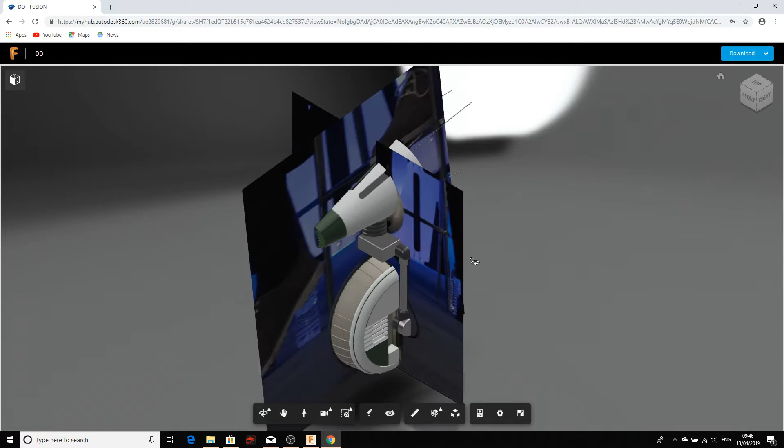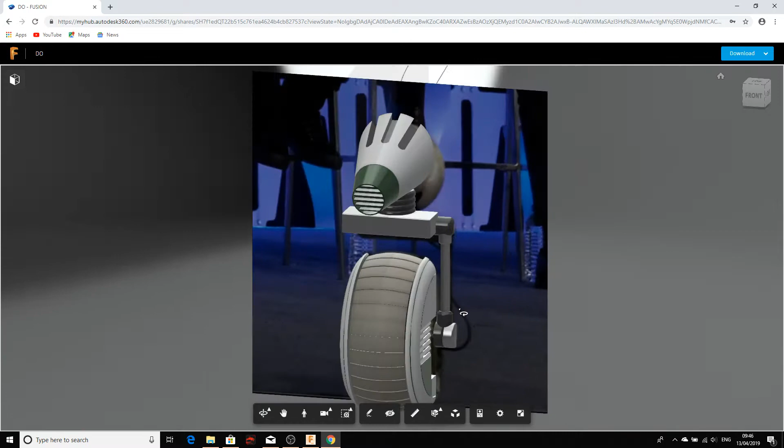So this is one that I've worked on recently from the new movie, and what's really handy I think with these, if you're building the models, and I'm just hiding these reference screens that we've got, but what you can start to do is you can start to look at how the model's built. You can see the individual components and parts that are in the model, which then lets you sort of get an idea of how it actually goes together.

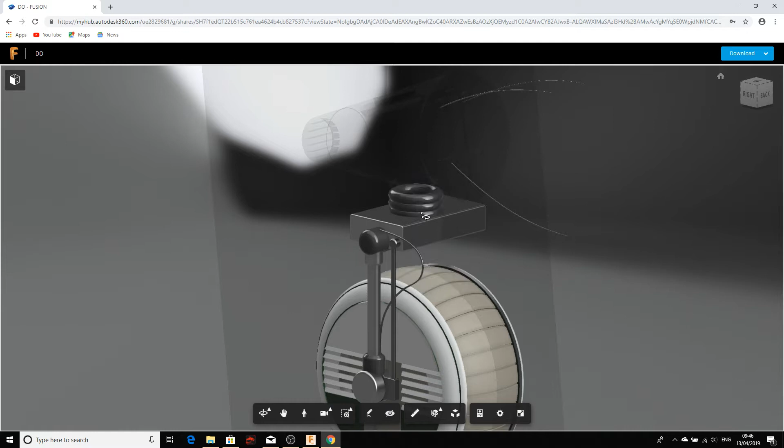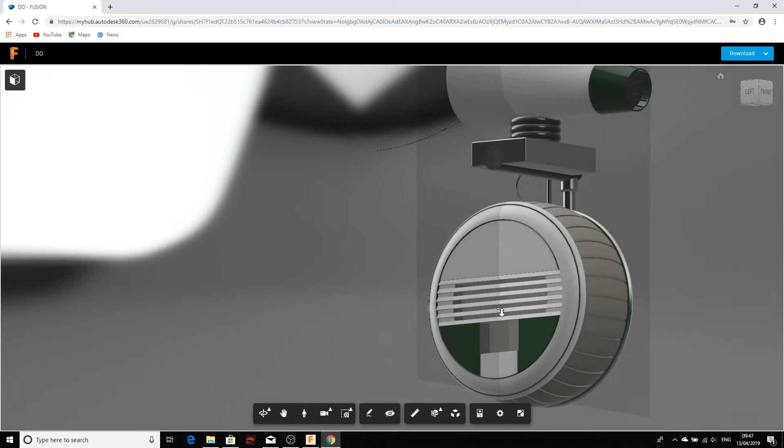So you can kind of really see the model and all of the assembly bits, and it's just really quite useful, I guess, rather than the PDF instructions that we put together, just being able to kind of dig in and to start to look around at how things are constructed, and to be able to take things apart and just have a look at what's going on.

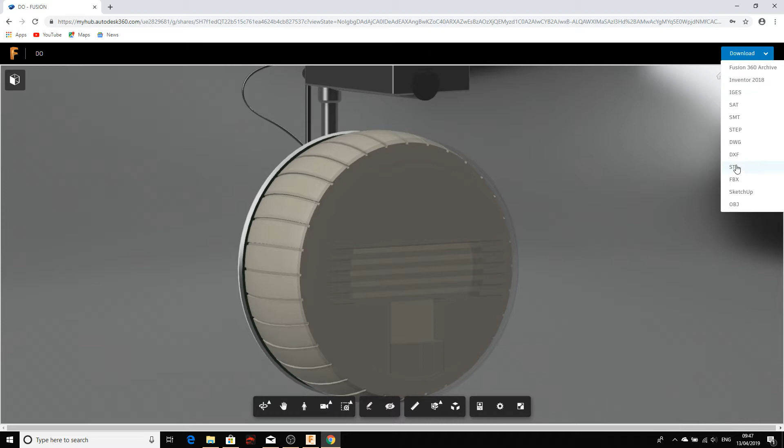So you've got in there a fairly basic set of tools through Fusion that lets you play around with this. What you can also do in here is you can download the file. So if we click on Fusion, you can send yourself an email link. You can download the step files. So it gives you access to all of the original files, which means that you can then install Fusion and start to work on them in your own kind of manner. So that's how you've got access to the designs.

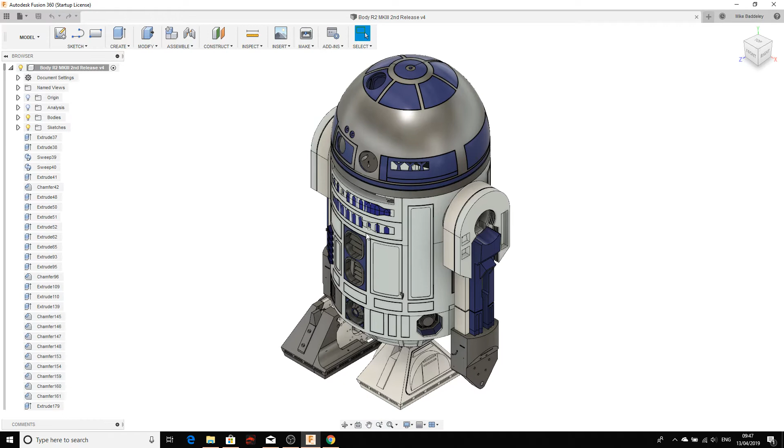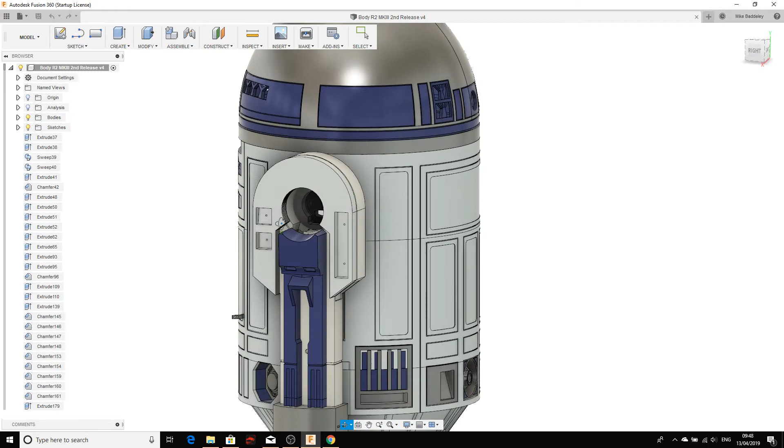What I was going to quickly do now is start to take you through the very basics of Fusion 360, but also more importantly, I guess, how you can start to cut your own pieces, just so that if you've got different size printers, you're not relying on me or the other guys to get them cut. You can cut them to whatever size you want, and cutting objects is fairly simple, really.

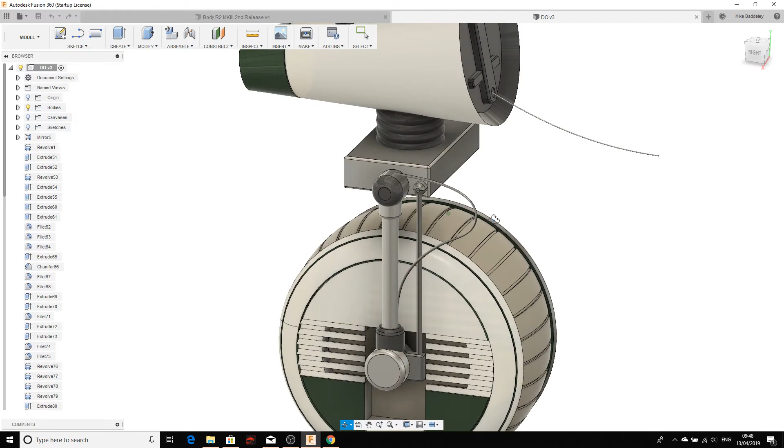So what I'll do is, just for the fun of it, actually, I might just pull up this little fella and just really start to demonstrate a couple of simple cuts. So there's still quite a bit of work to do on this. This was just the first sketch that I did.

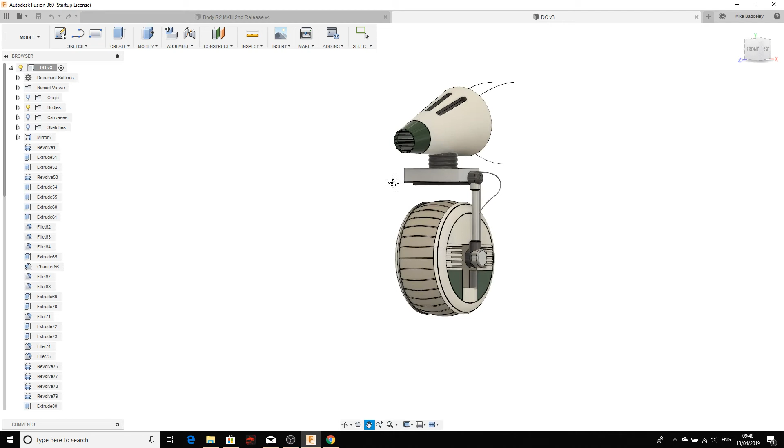Now, Fusion 360, if you've not used it before, basically the middle mouse button moves the object around. I tend to keep my finger on the shift key. If you press the shift key, you can spin it around like that, and that rotating and spinning gets you to most of where you need to, and then your mouse wheel will let you zoom in and out. If you get lost, the big cube at the top corner here, click on home and you're back in.

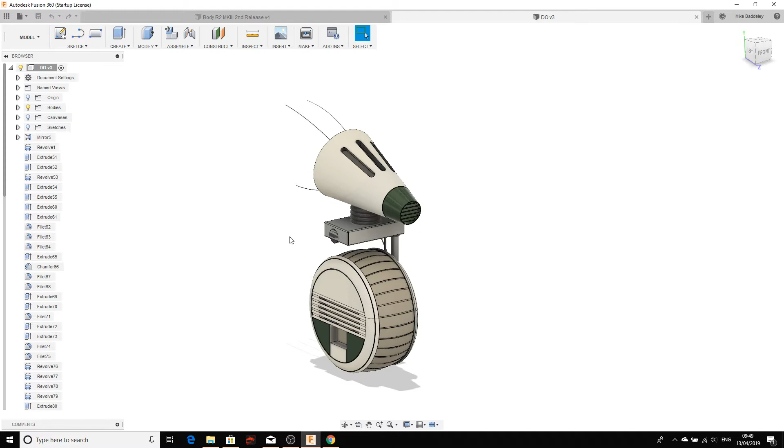So this isn't a Fusion 360 tutorial, but I'm just going to try and get you through the basics. So moving around, middle mouse key, press the shift key and you can spin it all around, and then you've got a cube which you can go to if you get lost, and the middle mouse wheel will let you zoom in and out. Okay, you got that?

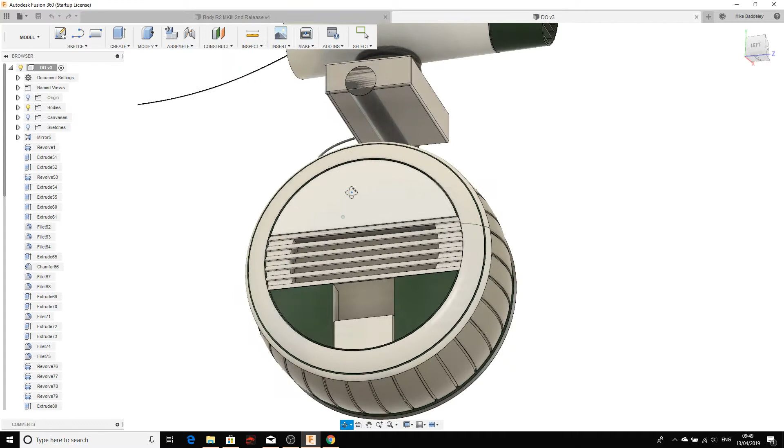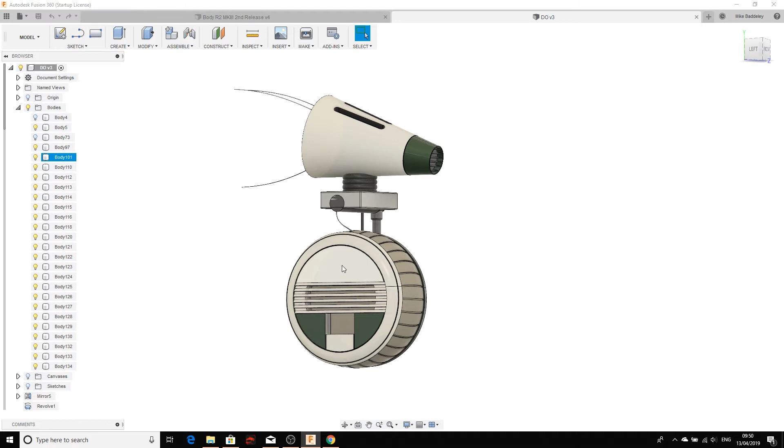Cool. Right, what we will do is, first of all I'm just going to do a simple cut on this side panel here. So, what you have on Fusion is you've got this browser window, and you can open this up and you can see all the individual parts that sit within here. And if you hover over them, it'll show you which parts they are. I'm going to make things simple, I'm just going to hide everything apart from this side panel that we're working on, which is that piece.

So the way you hide it is you just turn the little light bulbs off like this. I mean, there's probably quicker ways of turning them all off, but hey, I'll just click down here for the speed of it. And as you can see, each of the parts that make up that model are now disappearing.

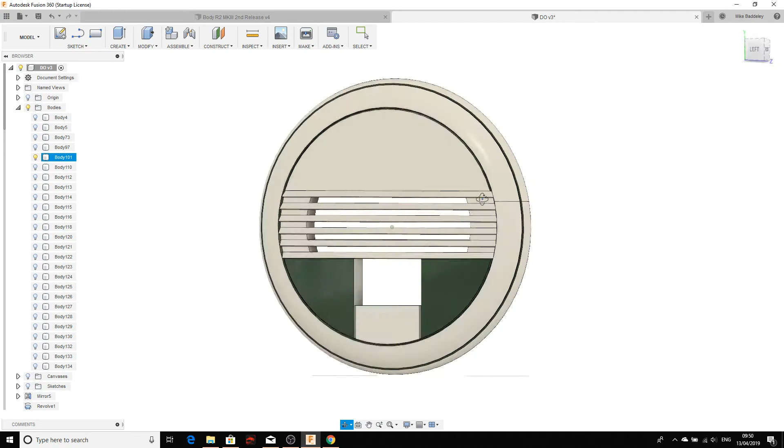So now that's the part that I want to cut. Okay, so I'll just click the house one to get it in there so we can see it. So what I'm going to do with this one, I think, is cut it in half, and I'll do a little bit of a dovetail there, so we've got a join. And I'll just take you through some of these really simple ways.

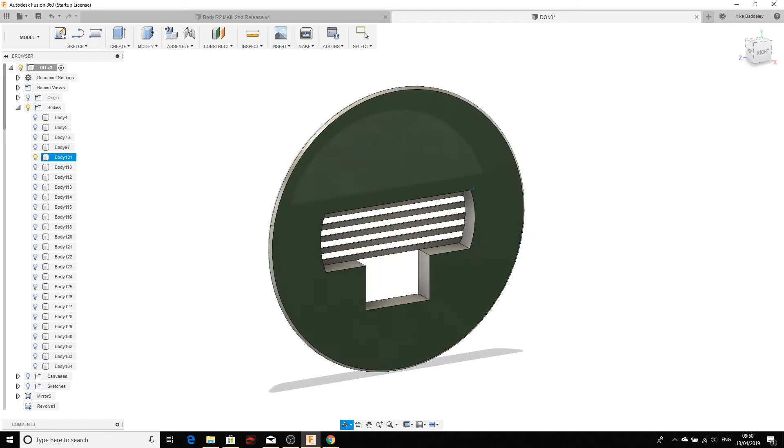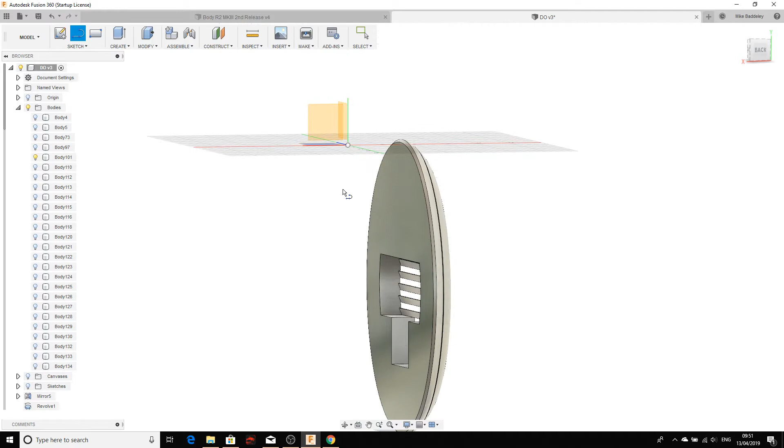So the way we cut something is we have to draw a sketch, and the sketch has to sit on a face. So in Fusion, if you click sketch and you click line, now what that's looking for is a face or a surface or a plane to be able to draw on. By default, you'll have these three little origins here, which are visible if you've got the origin buttons lit, or you can actually find a flat plane on the model.

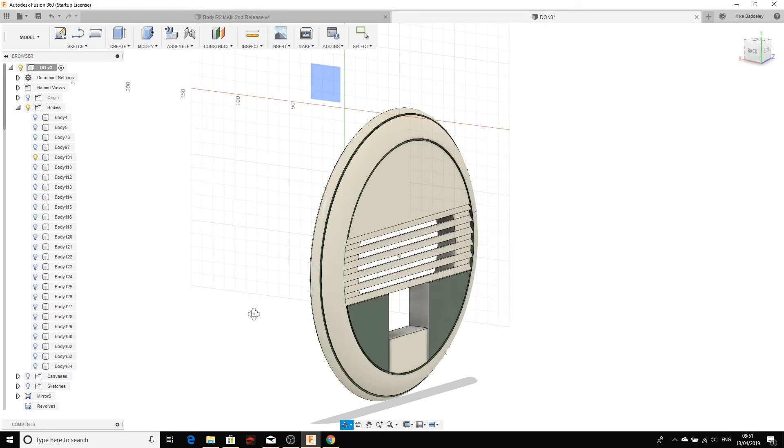The challenge we've got with Fusion is it doesn't allow you to select curved planes, only flat planes. So you have to find a flat plane. But for us, this is going to be quite simple. And to be honest, most of the models I do have got flat surfaces. So we're going to click on this one here. And now what we've created, as you can see, is almost like a piece of paper that's

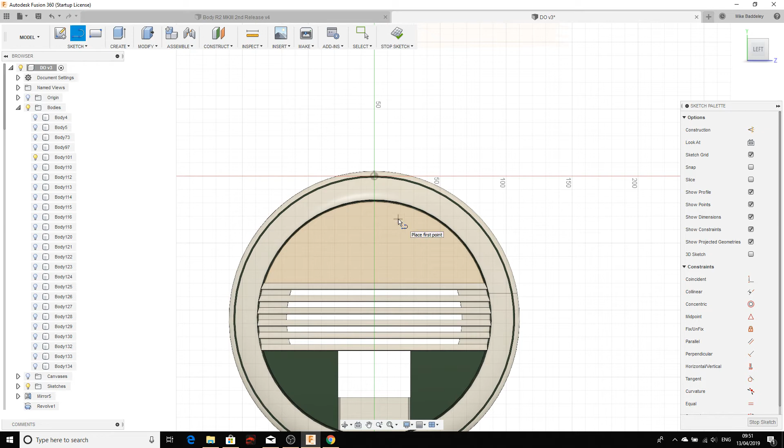linked to that piece. Now, if I want to do a simple cut, I can literally draw a line like this. There's your line. Any size, any angle. It doesn't even matter if it covers the object or not, but I'll just do it like that. Once you've completed that, you click tick, so the keys were just sketch and line, and we've created a line.

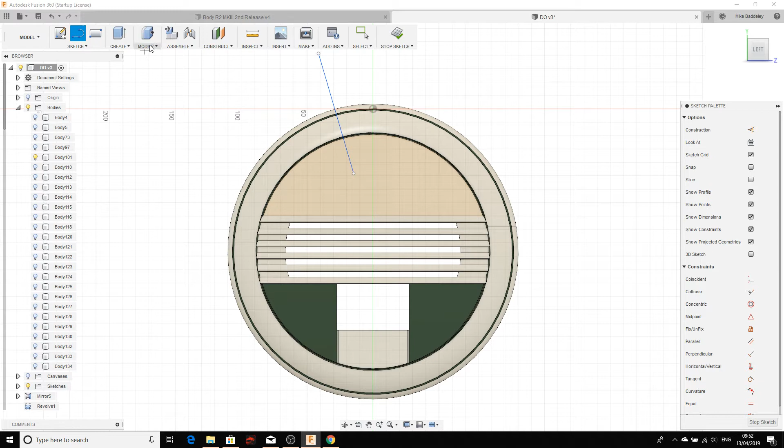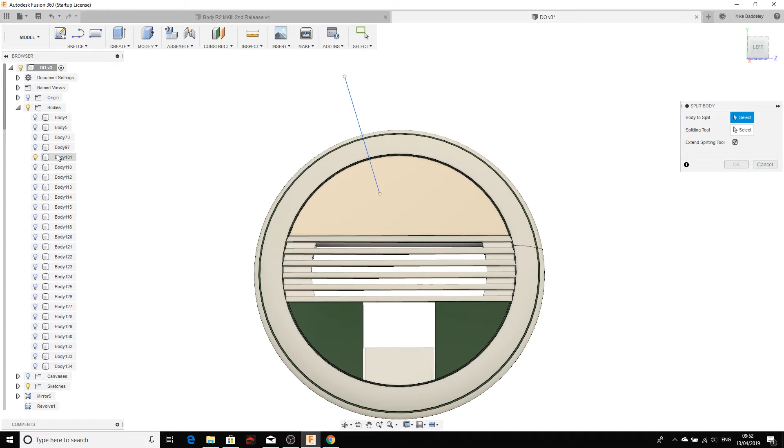So now I want to cut that object. I'm going to modify the object, and in modify you have split body, and split body lets you chop the body in half with a reference point. So when you've split the body, it's now asking me what body do I want to split. I've only got this one that's highlighted, so I'm just going to click on that body, and then it's asking me for a splitting tool. So how do I want to split it? I'm just going to click that line there.

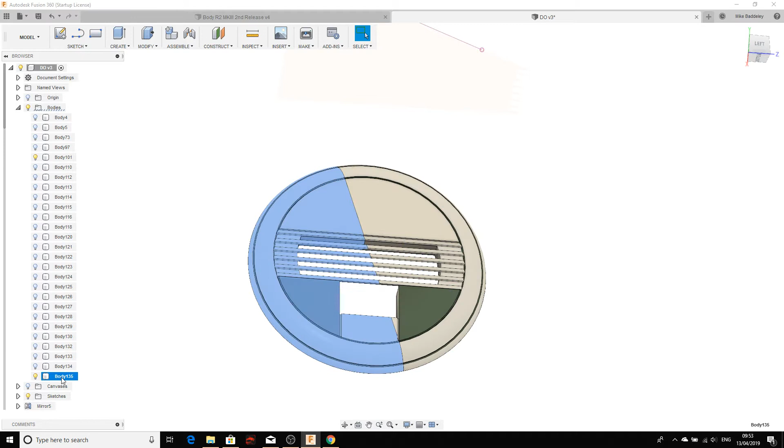Now what that's done is it's extended that line so it cuts right the way through the body, and it's showing you roughly where that knife's going to go. So you click OK. And now, if you can see in the browser, we've got two parts to that body. There's one part, there's the other part. So that effectively gives me my two-part split, which means that I could quite easily fit that onto the printer.

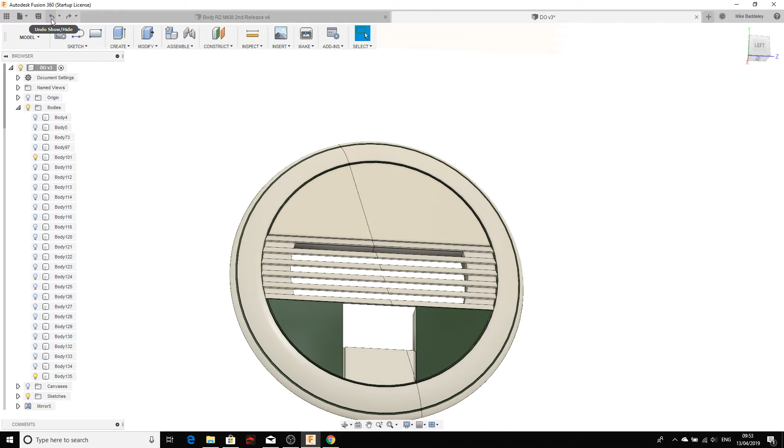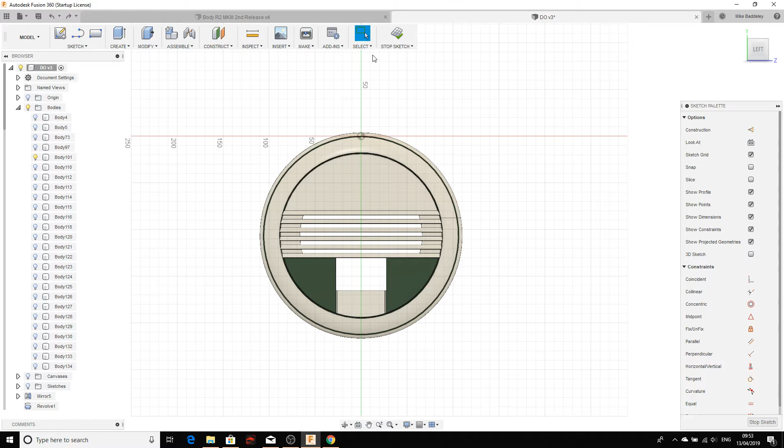I'm just going to undo that cut, because obviously that was just an angle cut to show you how that would work. And now I'll do more of a cut that is a little bit accurate, and also something that would be useful with, as I said, a dovetail. So stop sketch, there's my object. I'm going to cut a line straight down the middle there, and I want to put a little dovetail in this space here.

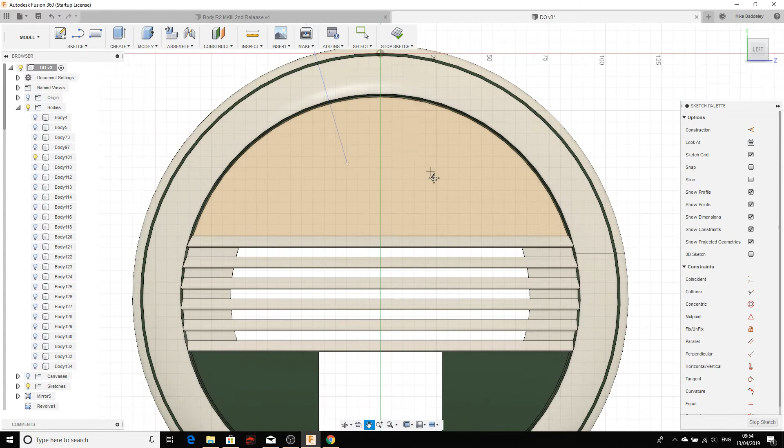So first of all I will click on sketch and click on line. It's now looking for a surface to draw on, so I want to draw onto this front piece. I'm going to just cut it straight down the middle like that. But before I do that, I'm going to put that dovetail in. So I'm going to draw that line to about there, and then I'm going to take a line off to do the angle for the dovetail. Now the beauty of Fusion is it does kind of snap to and line up with different objects, so you've not got to be 100% accurate.

So the first thing I do is I'm going to pull that back. Now you can see there's two measurements. One's the length of the line, the other one's the angle. That's 90 degrees. I probably want it about 70. So holding the mouse still, I just hit the tab key so that 90 is highlighted. I'm going to type in 70 and hit tab again. And what that does is it locks in 70. So it's now snapping to 70 degrees.

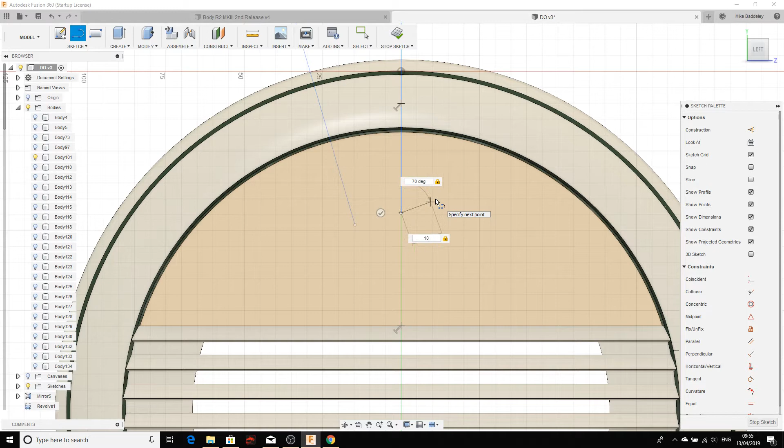I'll do the same on the distance. I'll just do that as 10 mil. I'll hit tab. And now I've got 70 degrees, 10 mil locked in. I'm going to click. And it's done that. Then straight line again. What should we do that at? Let's do that at 18 for a laugh.

Get it to the point where it snaps in straight, okay, and then I'm just going to zoom in a little bit and then do that return.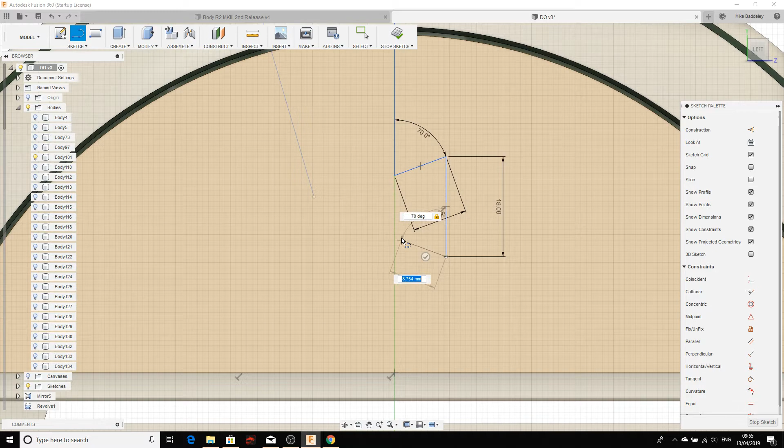So this is 70 degrees. What I want is a similar one again, which is tab it, type in 70, tab it again. It locks it in, and if you move it along, it snaps to that line.

Once I've clicked on that, now I can continue the rest of the cut. There we go, so what I've created now is a continuous line that just does that little dovetail cut for that object. I'm still in line mode, so if I hit escape, it just brings me back to this.

That line, that's the old line, that's annoying me, so I'm just going to highlight that and hit the delete key to see if I can get rid of it. It's not letting me because it's on another sketch. Not to worry, so I now have what I would say is the first cut.

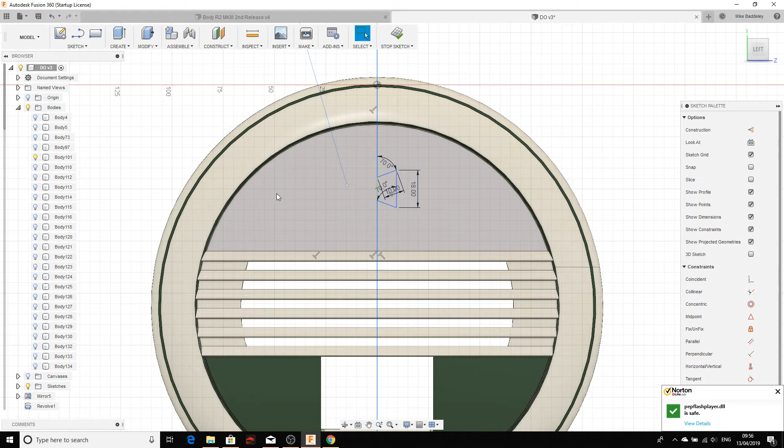The challenge with 3D printing is when it squishes the layers on top of each other, what it actually does is expand it slightly. So if you just do a straight cut like that and try to slot the two parts together, they won't fit because they're too big.

So you have to create a tolerance or a gap between these, you have to take a little bit of plastic out. There's a couple of ways of doing that: you could cut it and then pull the surfaces back in.

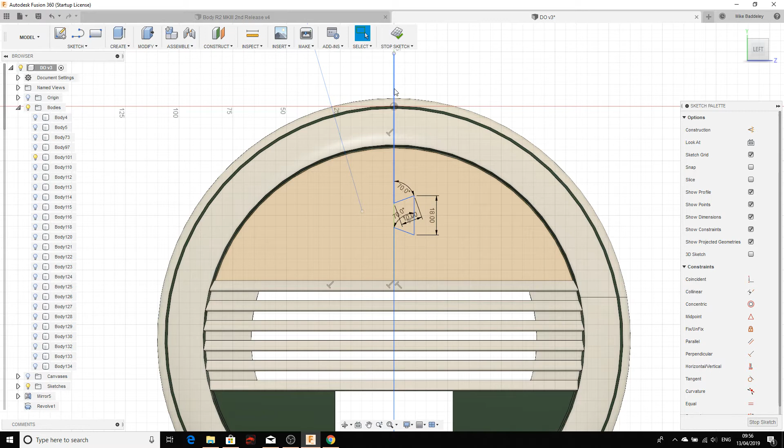Or what we're going to do actually is create another line very close to this line that allows us to have that tolerance. So if I double click on that line, you can see it's all highlighted.

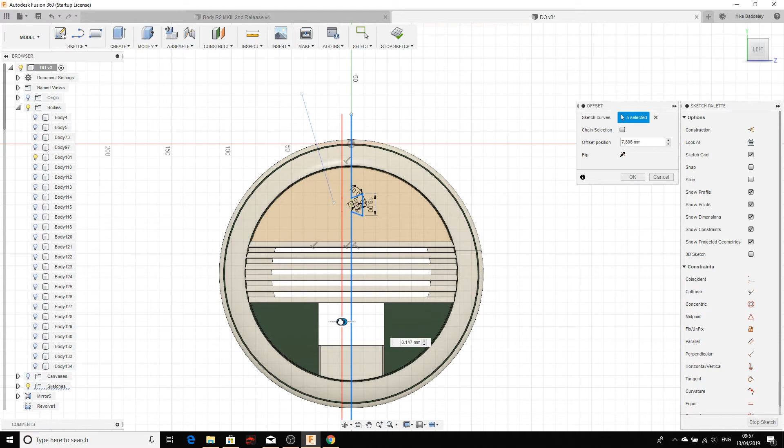And I'm going to use something in Sketch called Offset. What offset is, I'll just show you if you zoom in, is it kind of gives you exactly what it says on the tin, which is an offset. So if you move it like that, you can see what offset actually does - it's an offset from the original line.

Now, from experience, to get a nice tight fit, I would do about 0.2 millimeters. And that's given me a 0.2 millimeter gap between these two lines. If I click OK, I now have two cuts of this, or two lines to cut this object.

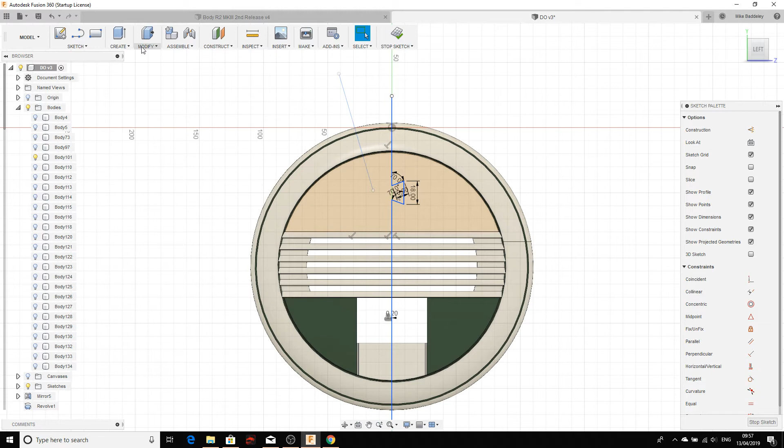The final part is we're going to cut it now. So if I click modify and split body. Okay, now when I've done that, a couple of things have happened.

I've gone out of sketch mode and my sketches have disappeared. You've not lost anything - if you look in the browser window here, there's our sketches, and it's purely because the light's not on. So I'll switch the light back on, and if you highlight that, you can see the ridiculous amount of sketches that I've got actually that sit within there.

So I'm just going to tidy it up so we can just see that one sketch. But there you go, there's your sketch.

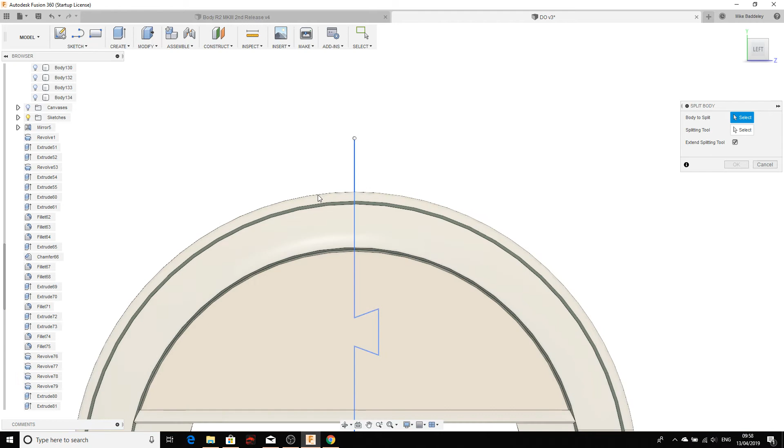So the first cut I'm going to do, you see these lines are really close together, is the one on the inside. So I'm going to click modify, split body. I'm going to highlight this body as a whole. And if you go onto the browser again, you'll see that the body's been highlighted.

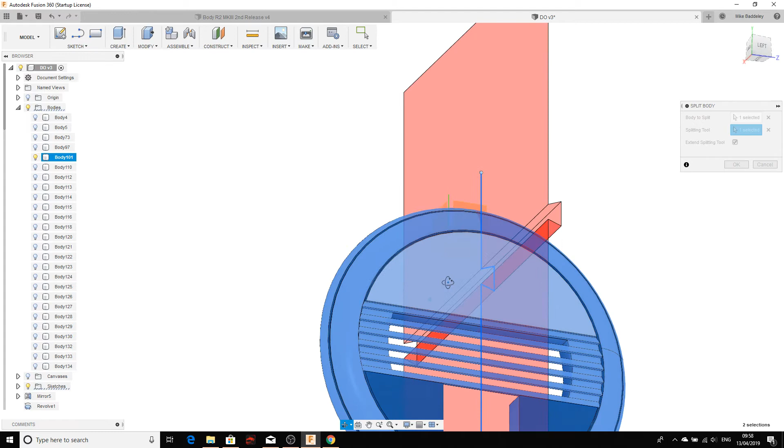And the splitting tool, I'm going to use that first very inner line like that. So I've pressed it now, and what you can see, I don't know if you see that in 3D, but what it's done is it's cut through the object. I'll click OK, and now, as you can see, we now have that dovetail cut inside the model.

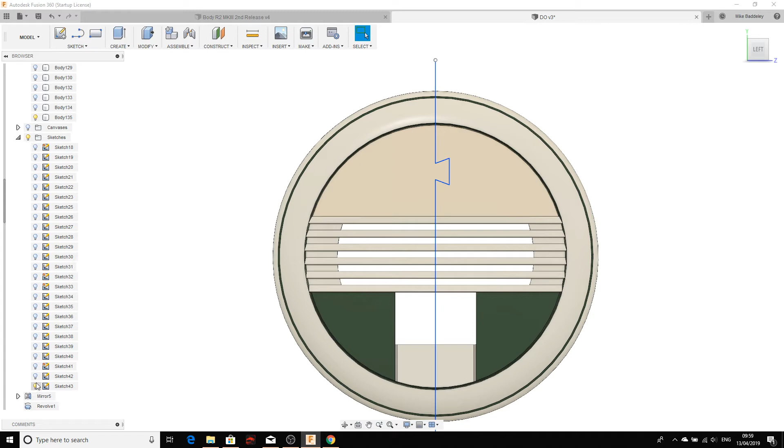What also happens, and you can turn this off by default, is once you've used a sketch, Fusion very happily hides it for you. So I can't see my second line now. If I click on that again, my lines come back again. So just get used to your light bulbs because Fusion does occasionally hide stuff.

So if you look at my lines cuts there, and I'm now going to cut that outer sketch. So similar, modify, split body. At this point, I've got to select this side because that's where I'm taking the cut from.

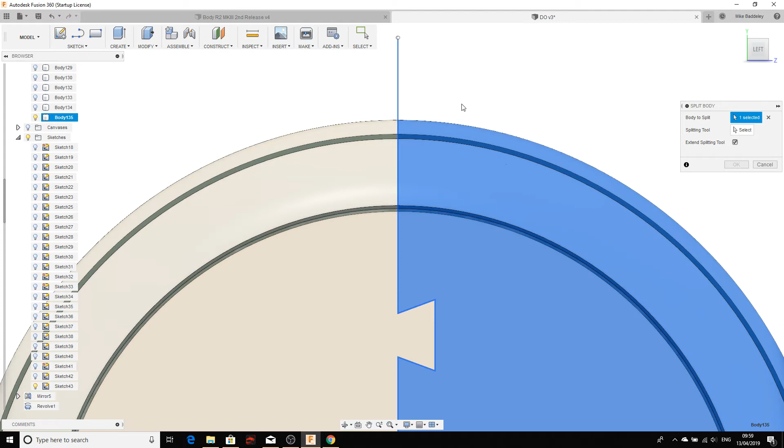There's two independent bodies now. And I'm going to click the splitting line as that second line there like that. And then I'm going to click OK.

So now if I hide the sketches, you can see I've got what looks like a thicker cut. But if I zoom in, I've actually got a number of parts here, 3 parts. I've actually got...

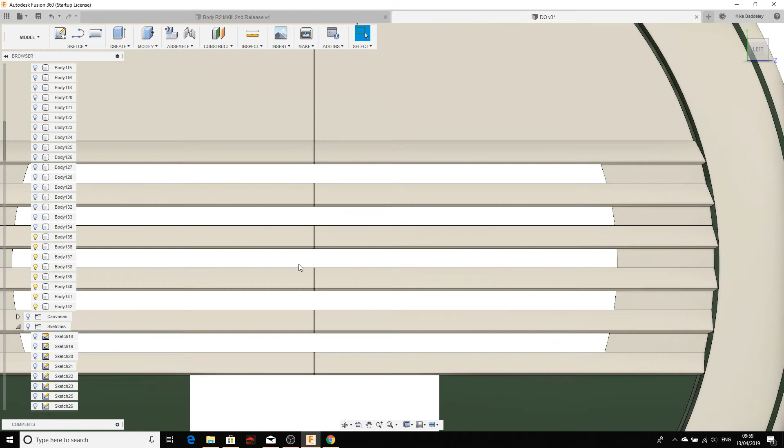If you look on the browser window, I've got lots of parts because these bits here that have been cut in the center are individual components. So the 2 parts that I want to keep is this outer part, I'll hide it, and this inner part, I'll hide it.

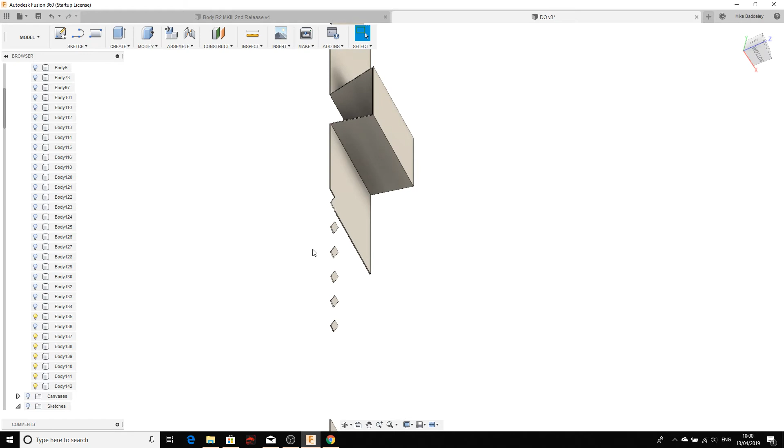So what I want to show you is the 0.2 millimeter lumps of plastic that we're trimming out, and they're all in there. They're the ones that are lit, highlighted. So I'm just going to delete those because I don't really need them, and because they're the ones with the lights, they're fairly easy to do.

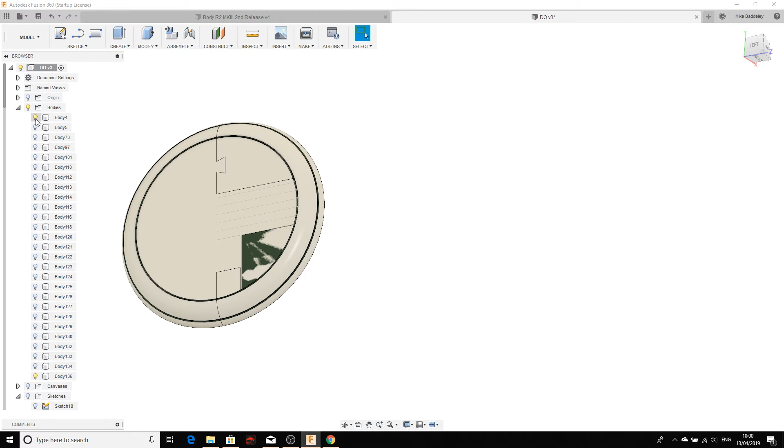Hit that, press delete key, and then those little tiny pieces in between, delete, and finally delete. So what I should have now is this piece, and I've got to try and find my other piece because I can't remember which one of these it is, but hey, that's straightforward. There we go. Right, and there you go.

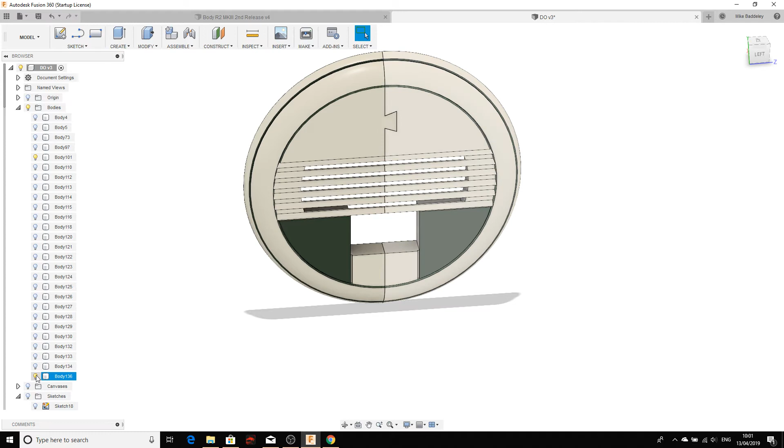So that now gives me a 0.2 mil gap, which is a good tolerance. I've got a dovetail there. Obviously what I normally do is a dovetail, but I've done this for a bit of speed, and effectively that would slot in quite nicely. The other thing I tend to do - and I'll quickly show you this, it won't work on this model so I'm only demonstrating it, I'll tell you why in a second - is I put little peg holes in

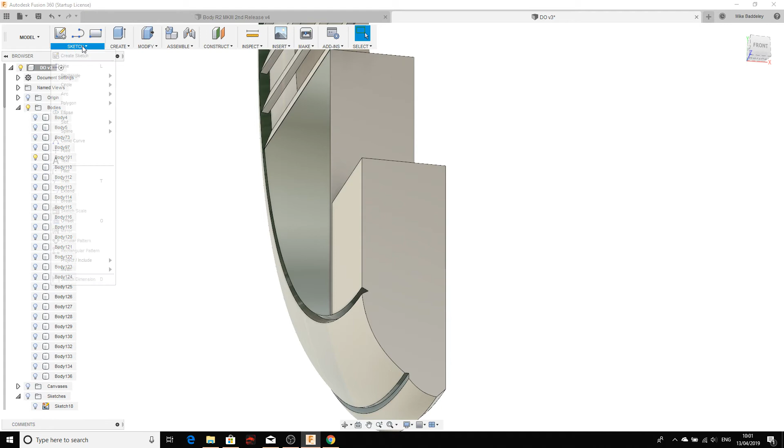for 1.75 mil filament so that you can use them for alignment. Very simply, once I've cut a face, I decide where I'm going to put the peg holes. I'll do a sketch and a circle, center point diameter, click onto that. And I'll highlight where I want to put the circle - you can plan this or just draw it, doesn't matter.

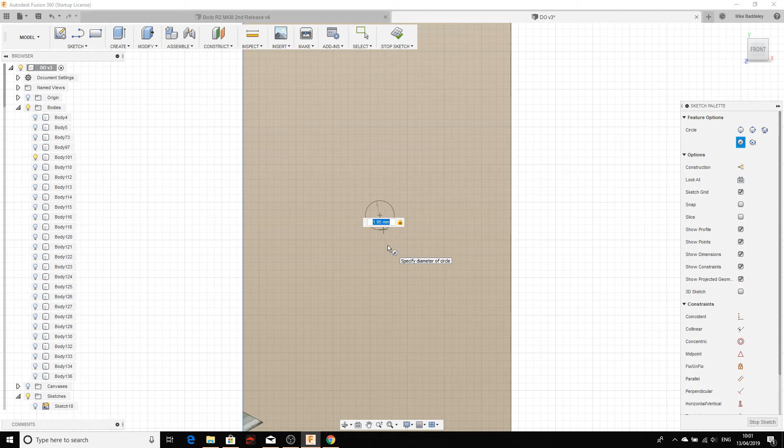And I might do 1.95 mil typically, which gives me that 0.2 again. It's really difficult getting accurate ones for this because it depends on your printer tolerances. This kind of works for me. 2 mil also works, so it can be whatever you want to have a little play with.

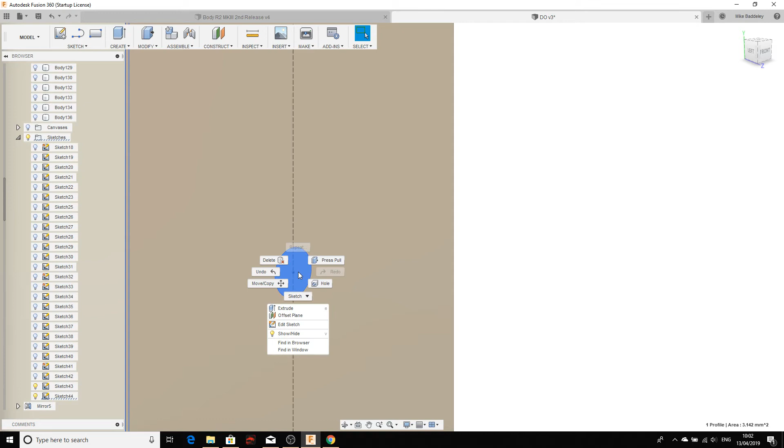And what you've created there - again it looks like it's in the sketch - there we go, what you've created is a little circle. So you can zoom in, highlight that circle, and that's how we're going to do the pegs. Now if I right-click on that, I'm going to do something called Extrude. Again, look on the other videos, but what Extrude does is it allows you to create lumps of plastic, just by pulling them out from that particular circle.

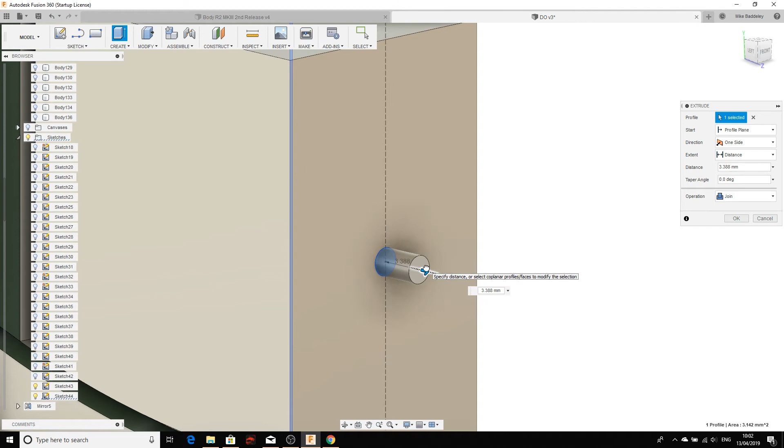So I'm cutting a hole. If I pull it into the plastic, look, it kind of cuts the hole. So it automatically decides whether it's going to make plastic or cut plastic, depending on the direction you're going. What I'm actually going to do is hide the other body so you can see what's going on - in the extrude setting, you've got direction, and it's got one side.

If I click on symmetric, it actually pulls it up both ways, which is really handy for pegs because it saves you having to do both pieces separately. So I'm going to do that first. I might do - what should we do - 7 mil pegs, 14 mil pegs. Yeah, we'll do a 14 mil one for this one. It depends on how much plastic you've got to play with.

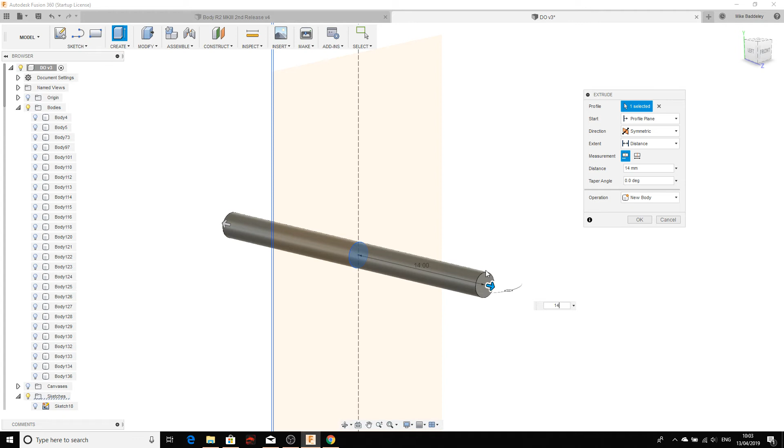But what we've done there is we've created a bar that's 14 millimeters long. Okay, and I'm going to bring back in these two parts. So that part, now you can see as soon as it's clashed, that's turned to red, which means it's actually cut. And I'm going to very coolly try to pull in the second part and missed a little bit, but hey. Right, so now I've got both parts actually visible, and I've got that.

At this point, I'm still in extrude mode. And if you look at operation, it's going to be cut. As long as the parts are visible, and as long as you've got cut, it will cut both parts at the same time. So I'm going to click OK on this.

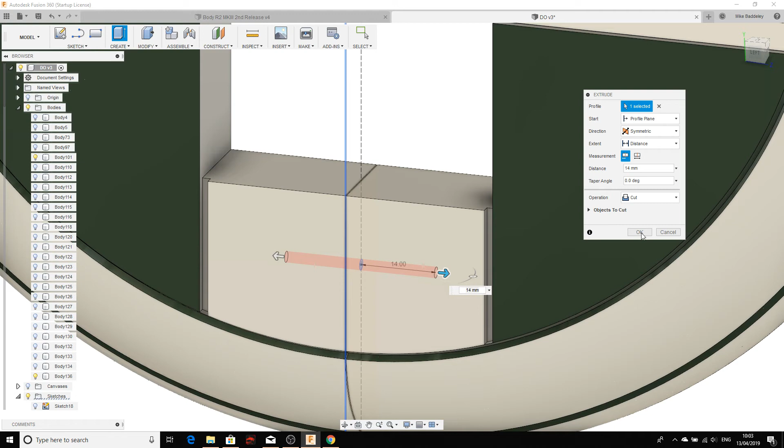Now, if I hide that, I'll just show you what we've got. So on that side, we've got a 7 mil hole. And on that side, we've got a 7 mil hole. So you can see that what you've now got is that keying peg hole for joining those two parts together.

The reason it wouldn't work on this model, as I said before, is that what we're going to be doing is having a push dovetail there and a part that has to slot together, which means you're going to have to try and push the dovetail and then squeeze the plastic in between.

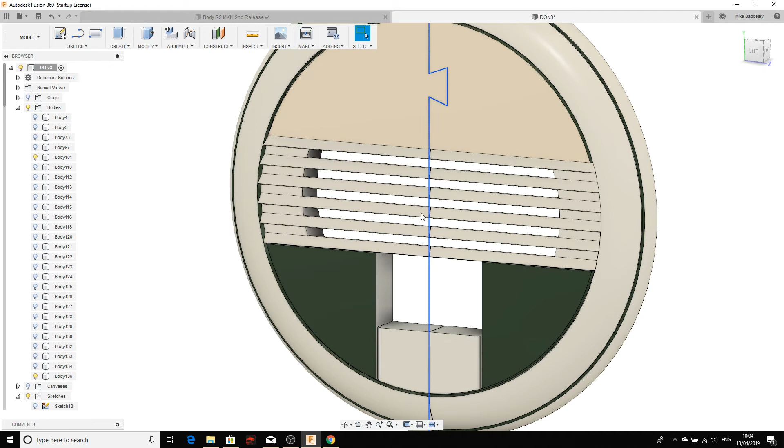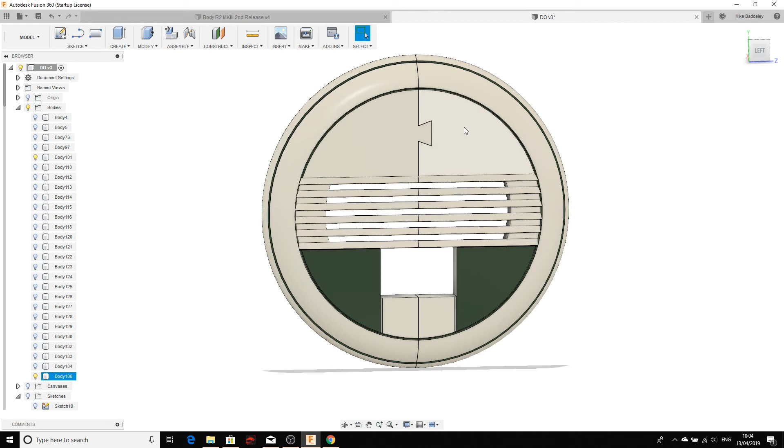It's messy, so you either have pegs or dovetails, but I wanted to show you how that actually functions. You can apply that to any of the fusion bodies, cutting them in whichever shape and form you want through the use of sketches. It doesn't have to be straight lines, it can be circles or all sorts of stuff. But the basic function is you draw a sketch on the outside of a flat bit.

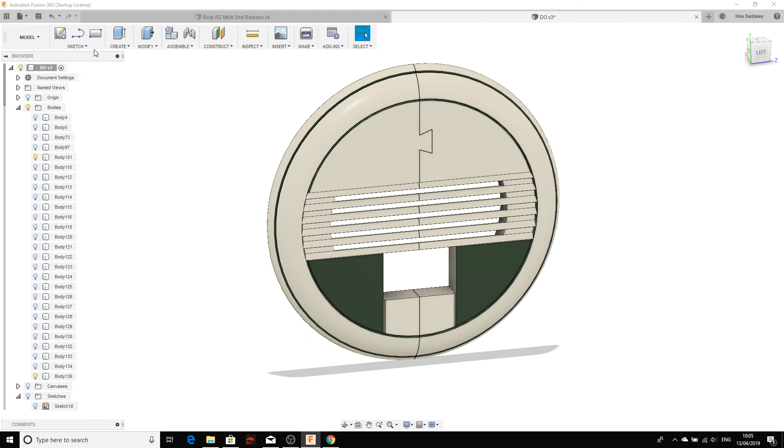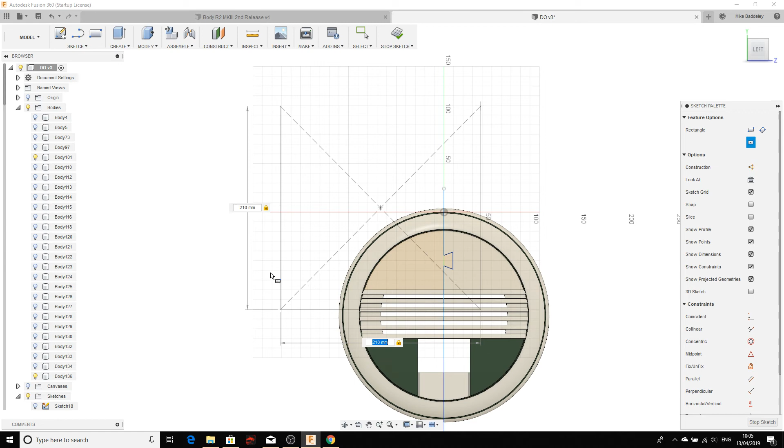You cut the body, make sure you've got tolerances, and then you've created your cut that will fit together. Every time you sketch, you will have dimensions. Let me quickly show you. I'll create a center sketch and draw it onto that flat plate. When you're drawing a square, there we go, you can see the dimensions. One thing that's quite handy is if you've got a 210mm by 210mm bed printer, draw a little square like that, double click on it, right click and move.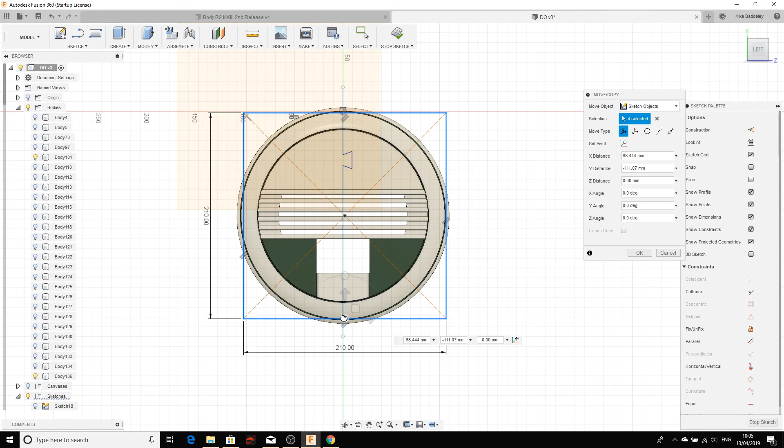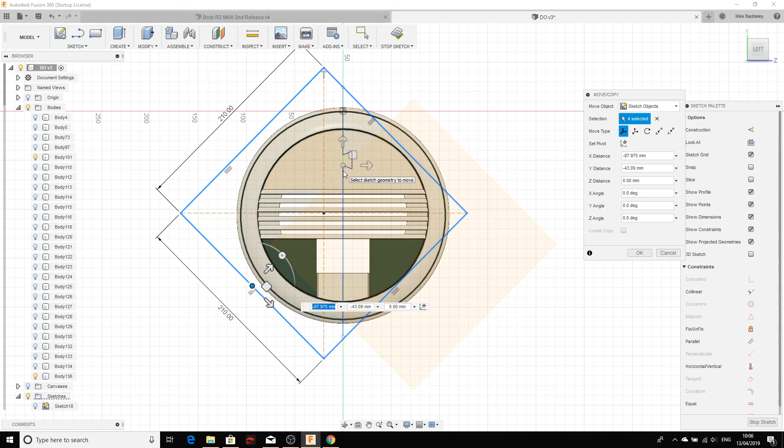What you can actually do is shift that square about so I can see if it's possible to do, for example, that plate as a single print. Obviously it isn't. I could say I need to cut that in 4 to fit it onto there, but I can also rotate the part on the bed, and then I'll get that half a circle on the bed plate. It just lets you see in the space what size print bed you've got and if it would fit.

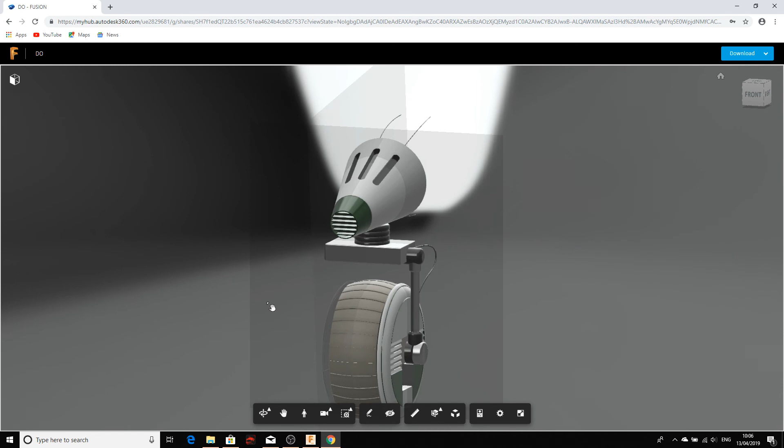Okay guys, so that's a very quick Fusion video. I also wanted to show you the web interface, because I think it's not just useful if you want to design and cut your own parts, but it's incredibly useful as a reference when you're building the model. We've got the PDFs, but being able to just bang it into a web browser and look around a little bit helps you start to understand things.

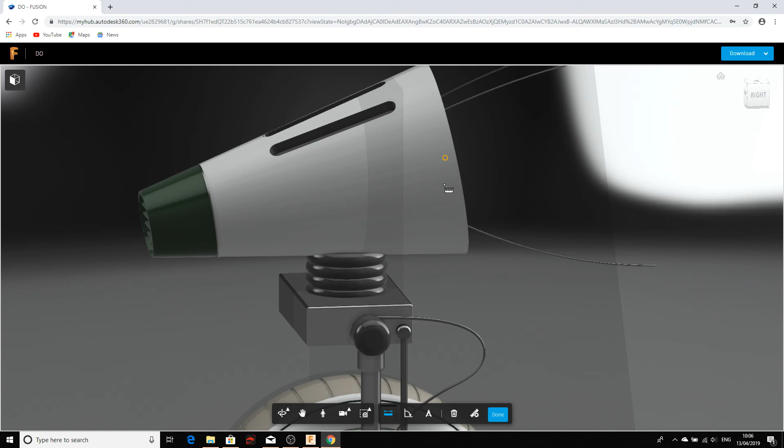You can also do stuff like take measurements if you wanted to check various dimensions. There's all sorts of little tools that sit within there, so it really is quite a neat little interface.

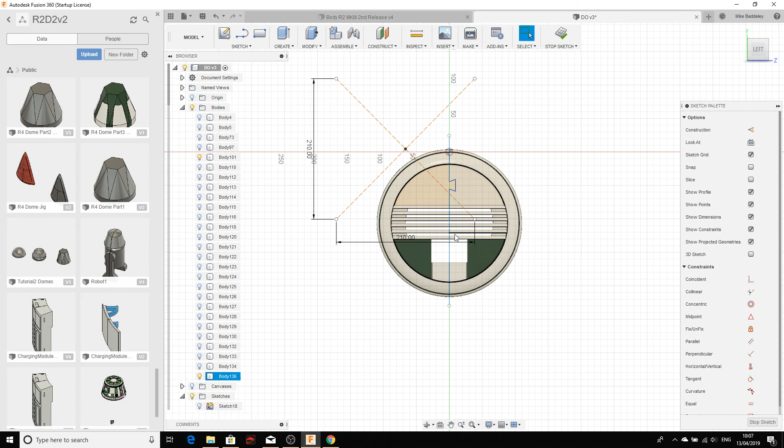So guys, that's it from me, I think hopefully that's been helpful on cutting models. What I will do just after this one is record a similar video on cutting meshes. One important thing to point out is in Fusion world, the models we're playing with here are very different from meshes. Meshes are the STLs, so if you do get an STL file, a ready to print file, cutting those is a little bit different.

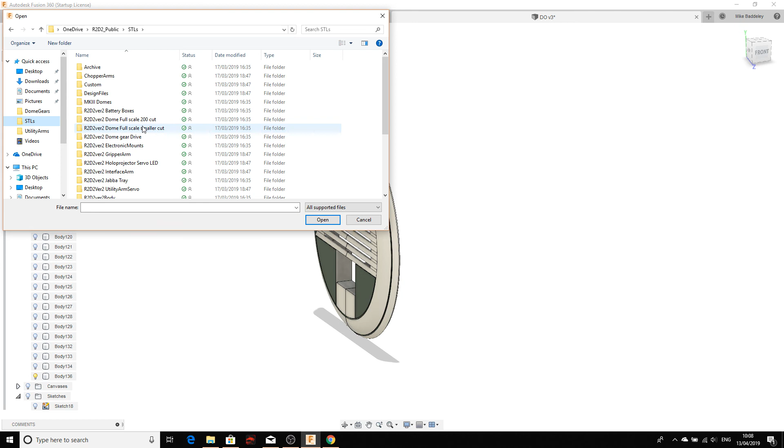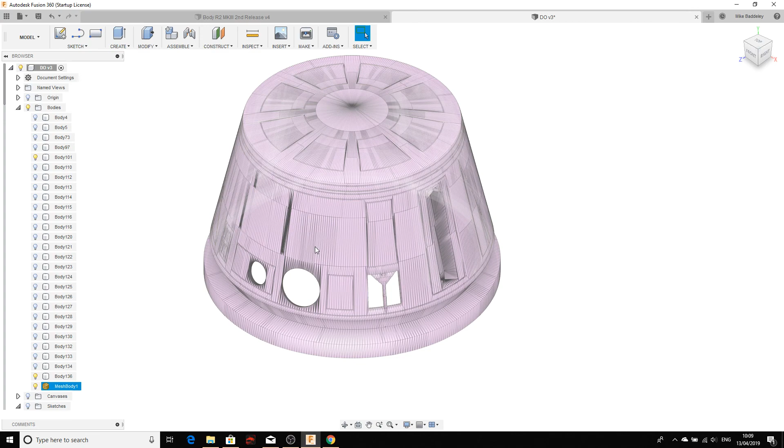So I'll just pull one in there, insert mesh STLs. I don't know what mesh STLs we've got, let's just pull in a single dome like that. Mesh files are very different, as you can see - I'll pull that into Fusion. What mesh files are is they're made up of lots and lots of little triangles. You can't actually grab hold of faces, so cutting a mesh file up is very different than cutting the original design body up.

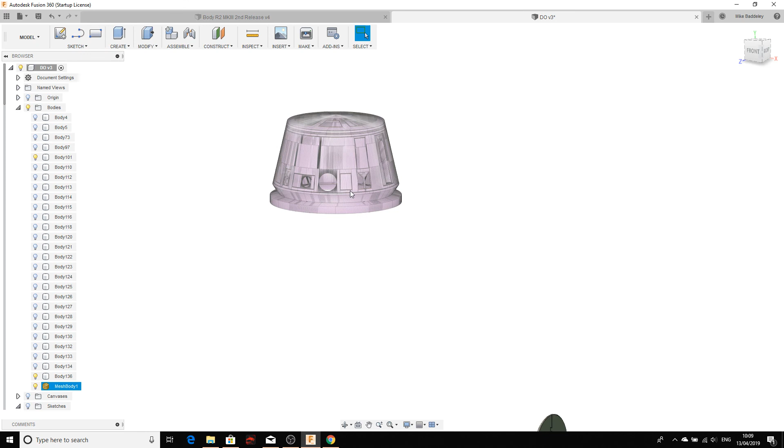I will do a quick mesh tutorial on cutting those as well, but as I said, they are a little bit different. This one is very much for cutting the Fusion models, or the step models, which is the format you can load into a designer.